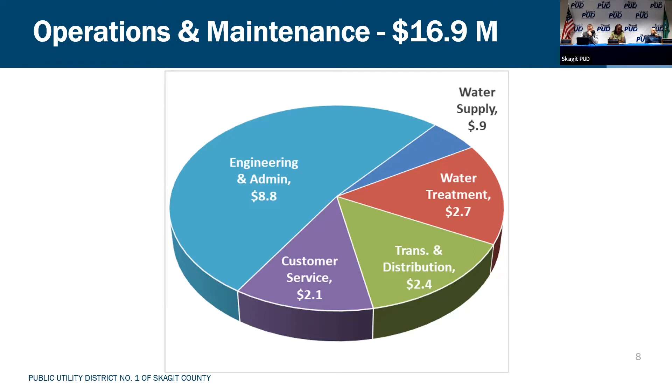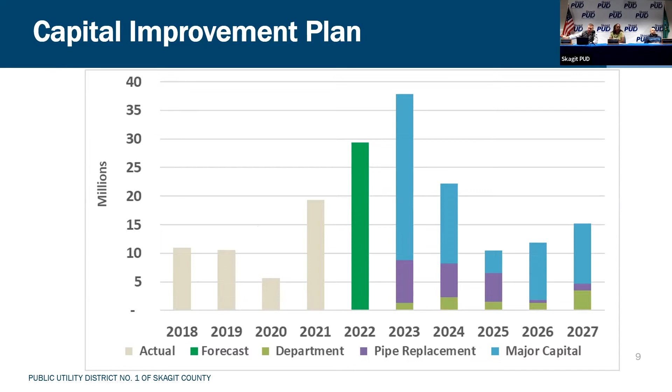The capital projects, as I mentioned, $38 million next year. We have 3 facility projects. Most of that is the campus building for about $16 million. The transmission line should be done, and that'll be about $10 million next year.

Pipe replacement projects, there's various projects that make up that $7.5 million. And then operation and maintenance projects. The largest one is at the water treatment plant, as I mentioned earlier, and it's the backwash and pump replacement. There's also SCADA replacement projects, and then department projects. This is for smaller department projects that consists of vehicles, equipment, some maintenance projects and facilities, software, meter replacements—all show up under the department projects.

After we put all those numbers together in the budget, we balance resources and uses. We validate the financial policy metrics that were also adopted. There are 4 main metrics that we use. The first one is the liquidity target.

This takes the estimated ending balance of 2023 at the end of next year, all of the reserves. I forecast that out, it's about $14.6 million. Our target is 180 days of operating expenses, and so you divide half of the year in operating expenses, that's $8.7 million. And you can see that we exceed the target by just under $6 million.

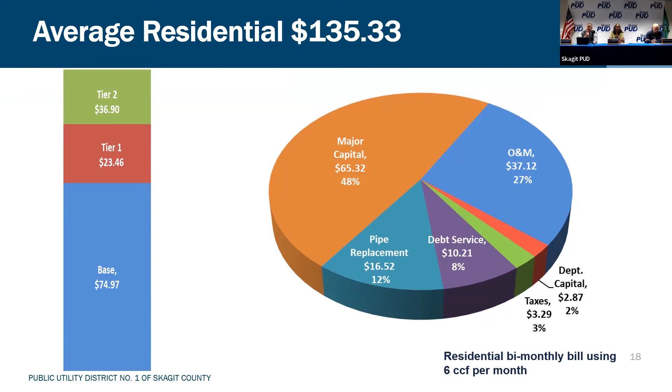I think that's all of the presentation other than the budget schedule. Tonight is the budget hearing, and we will take public comments if anyone is here or wants to make comments online. I will also accept them after this by email, and we can incorporate them.

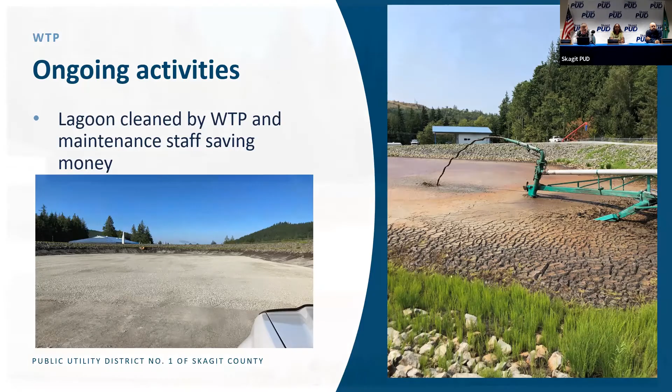So this last season, this year of 2022, this is that same lagoon on the left that with the cooperation of the treatment plant and maintenance, we dried it out. Basically we took all the water off of it, quit decanting to it, and let it dry this spring. It got dry enough where we were able to go in there and scrape up the residual that didn't get pumped out last year. You can see the cleaning off of the banks on the right and left-hand sides, and really cleaned it up back to like fresh, brand new.

The asphalt only goes through a certain portion of the bottom of this thing to scrape it out, and then the sides are kind of a natural clay bottom. It's not like a drying bed, so the moisture never really leaves. So what we decided to do this year is we brought in gravel with our paver and roller and rolled the bottom and basically made almost like a concrete bottom to it.

It'll make it much easier to clean if we can keep going through the cycle of not allowing it to fill up to 3 or 4 feet of material like this has happened in the past. We're going to try and keep them lower and rotate them each year and dry them out and clean them out ourselves and potentially save ourselves some money. That's what we're trying to do anyway. So between the treatment plant and maintenance, they did a great job this year of rehabbing that one, the one basin there.

Now recently we've noticed some cracking that's getting worse on the filter bay decks and walls. So we have a consultant we hired about a month ago that came in to assess how bad the damage was, if it's superficial or if it's structural or what's going on. Then we had engineering go up and we shot some survey points on a portion of the filter bays to see if there's any continual settling going on, or if this settling happened over the first few years of when these basins were added on as part of the treatment plant upgrade a few years ago, or it's been more than a few years ago.

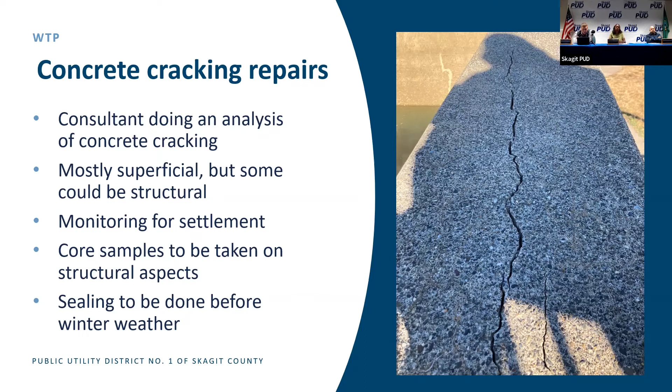So we're going to monitor this situation, and we're going to take some core samples out of some of the bad spots. The process that's going to happen this fall is we're going to take these cracks - most of the cracks are on the top parts of these filter bay walls right here where we expanded the filter bays. Then there's some cracks along the other basins here, the floc basins here and here. And there's a settling point here where the plant was put together and this was expanded, that there's a gap in the wall right here.

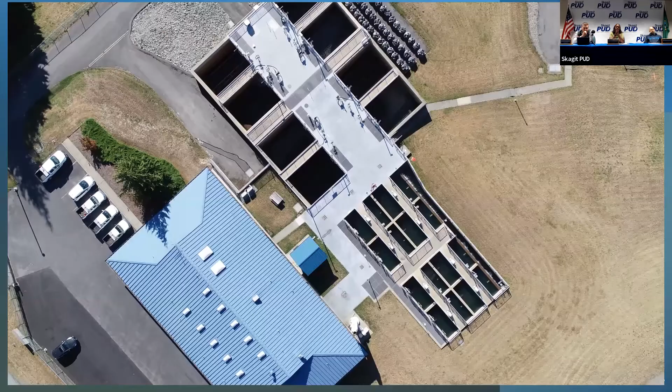But there's about 12 or 13 foot of fill material in here because these walls go down a pretty good distance. So at this point, we're not sure if it's a major structural issue or is this just where it's settled and that's where it stopped. But for the winter, we are going to go in and have these cracks mitigated. This is just an expansion joint between 2 large walls, but still it should be basically ground out and filled with like an elastomeric type sealer. So we're going to go ahead and do that this fall, basically winterproof it. Same with all the rest of these cracks.

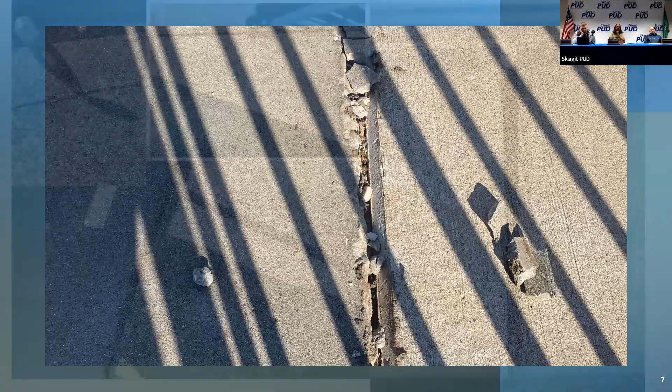We're going to get them ground out and sealed for the winter, and then monitor the settling and see if anything else is going on.

This is the one portion on the right where the floc basins were added on in the last expansion of the treatment plant, and you can see a pie-shaped sag there. Again, we've taken the monument shot and shots around the basins, and we'll watch for settling as time goes on.

The stuff they use will go in there and actually coat the rebar and seal it and keep the corrosion from happening further. He felt that maybe the rebar was poured too close to the top of the wall. So I'm not real concerned about those, more concerned about the one on the right with the sagging of the floc basins.

We've heard a lot about the chlorine scrubber. This is the picture of it as of this morning. Broke ground on the 5th. The electrical and the rebar all got inspected today, and concrete will be poured tomorrow, so we'll have a slab in place.

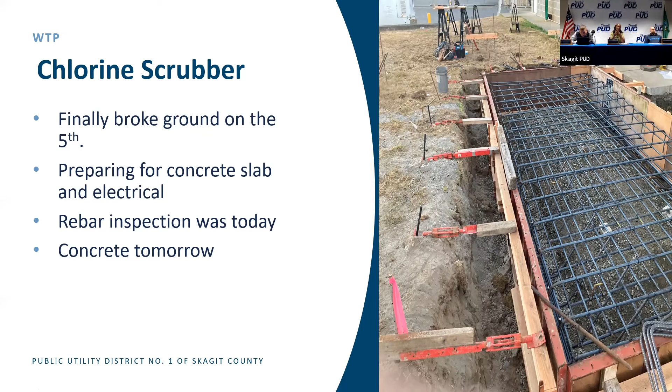You can kind of see electrical stubbed out over here in the corner. So that's going to progress rather quickly now. We hope once we get the slab in there we can get the scrubber on.

Gutters. I'm sure you've all noticed the gutters got ripped off last winter in the storm on the treatment plant, and some here on the building. We've had a hard time getting any type of response from any gutter replacement companies to come give us any kind of a bid or replacement.

We finally got Fisher and Son, who started up their own roofing portion of their company, and we finally got a bid to replace these. We've had other companies come up and look at it and say, oh yeah, we'll get back to you.

Never heard a thing. The difference between the gutters on these is they're 8-inch gutters, and the gutters are hooked to the flashing that goes up under the roofing. So you have to take the roofing up to replace these gutters properly.

So we've gotten a bid to get them replaced, we have a contracting process, and now they're going to start sourcing materials. Hopefully we'll get these things done, because it's a safety issue, obviously above the doors and the sidewalks, with water running off and potentially freezing on the sidewalk, besides just the visual appearance. But that's finally in process after numerous attempts to get somebody up there to get them fixed.

Like, this is the PUD, we need to get the water right. Can't get anybody to show up to do a job, and then when they do, it costs you a fortune.

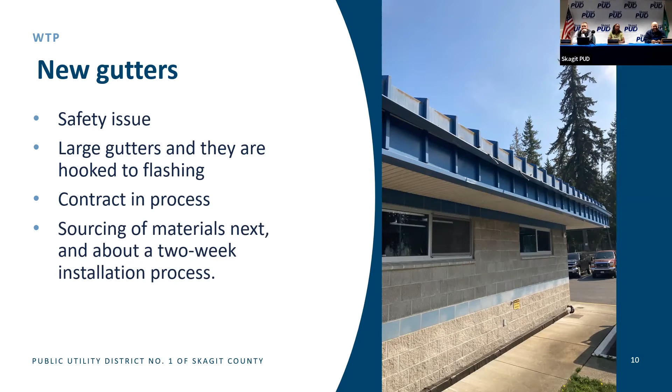But yeah, they're kind of torn off the front of the lip of the building there, right over the front door. So we're going to get them done, obviously, all the way around the building. But again, it's a larger process than just a nail-up gutter, because the flashing goes up underneath the roofing, so it's a fairly complex process.

Talking about meters, we've had 40 meters tested this year, around 40 of the 2-inch to 8-inch tested, and 10% of those that we tested showed a combined loss of 17%. That's just across those 10%. I should say 10% of those meters showed revenue loss, and the 17% might have been 6% on one, 1% on another. But regardless, we got them all repaired and fixed.

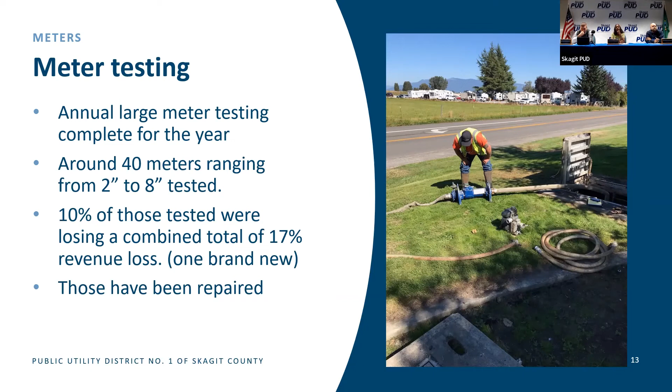So it's a good thing we've been out doing this meter testing program, because that's pretty substantial. One meter wasn't working at all - it was dead right from the factory, it wasn't even turning the turbine. So it's good that we went through this process and found these things, and we'll be doing it again next year as well. The ones that were failing have been repaired and put right back in service.

So that's a test meter on the left that they use, a calibrated test meter. On the right-hand side, what has been done over the last several years is put a 2-inch test port on the back side of the meters, which for a long time we didn't have, but we're ordering now with test ports. You can see where the hose hooks on the back side - that's how you get the water out and test against the comparative meter.

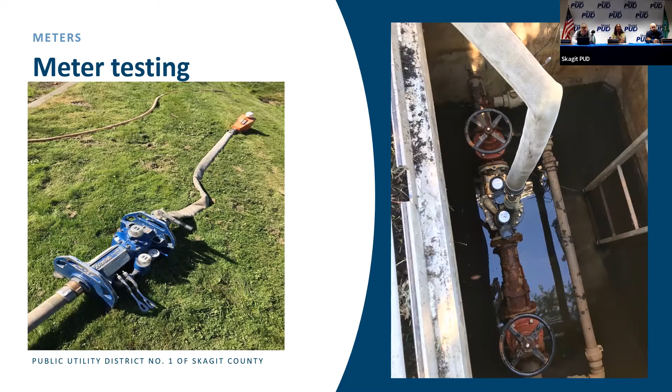Talked a little bit at WPUDA about some of our resilient stuff we've been doing. We've put underground wire at the Alger well. Our Alger system is a little bit fragile due to the amount of usage on it and its reliance on power. The power up Cain Lake Road is really iffy, and we had an overhead strike from the poles you can see in the pictures at the top of our pump house, with limbs coming down in the wintertime. Our power gets knocked out, communications get knocked out. So we decided it'd be a good move to trench it and put conduit, an underground service between the poles and the buildings.

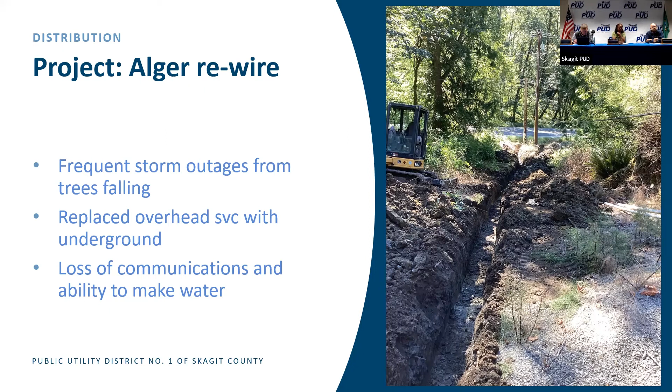We did that this summer, so now our communications and our power are both underground, which should give us a lot better resilience there. At the same time, we also put in a standby generator with propane. So now anytime the power is out, we will still have communications and power to run the well.

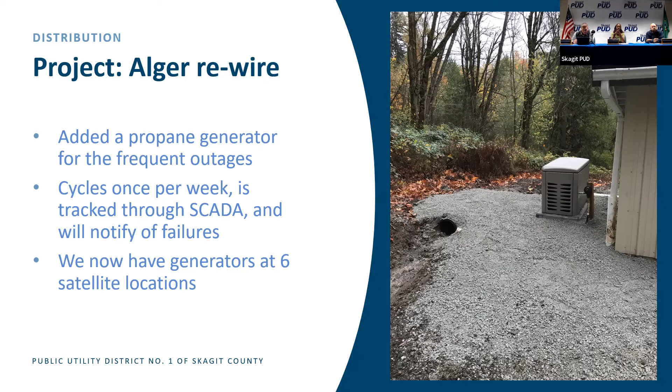We've done 6 of those now in the last 4 years, probably. We have 2 at Alger, just put one in Rockport yesterday, and a few other places out there in the system, which makes us more resilient to outages and keeps people in water. We're going to continue to do probably 3 or 4 more at all our satellite systems as time goes on.

We had our annual reservoir cleaning last month. This is Eagle's Nest at Eaglemont, our tallest tank, which they typically can't do a very good job on because they can't spend much time on the floor. The diving time is so short because of the amount of water in there — divers can't spend more than about 15 minutes apiece on the floor. So you've got to switch out divers, and it's 120 feet tall. Getting their gear back and forth was difficult, but they managed to do it this year and get us an inspection of that reservoir, and I believe 5 others.

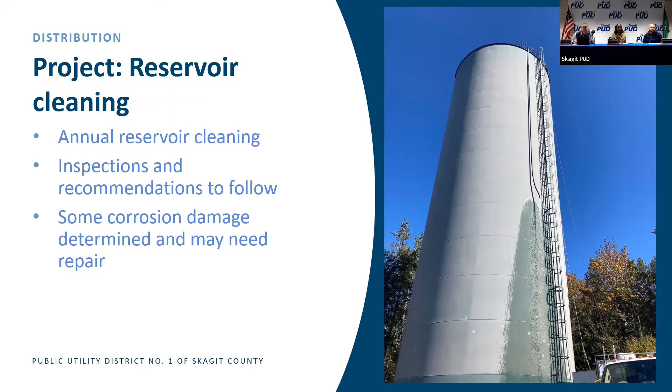What we get back at the end of the diving season, which we do every year, is that all the reservoirs have a diver in once every 5 years. So we get inspections and reports back to basically tell what they've seen. They have an underwater video to point out corrosion spots and flaws in paint or things like that — that's what we look for in the report. If we get the report back, we look at it, and the next time they come out, we can have them address it and fix it. It's just a continually rotating cycle on all of our reservoirs for the cleaning and inspection process.

The transmission line tie-in was the fourth between the 24 and the 36-inch lines. It's an 18-inch tie-in that was done at the base of Fox Road, which basically gives us the ability now to shut off the transmission line between the bottom of Fox Road and the treatment plant if anything was to break — that's been our Achilles heel over the years, where it's broken the last few times on the hill. Now if we ever need to, we can shut a valve off and isolate that portion, but for now we'll still keep both lines running.

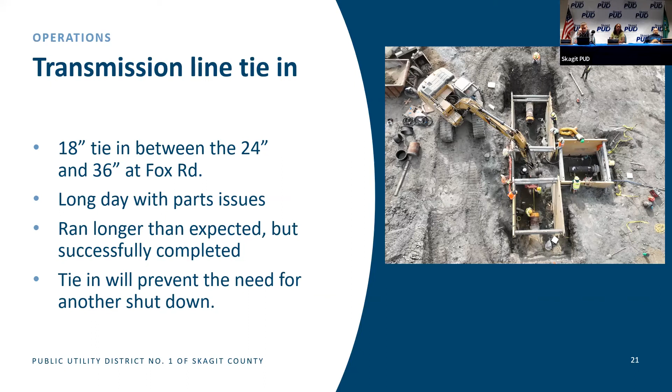It was a long day for the crew. We had some parts issues, not fittings — things weren't lashing up well. They spent 12 hours in that hole working on that job. The distribution department spent probably 16 or 17 hours that day shutting it down and all the way through turning it back on and flushing. It was a large project by all the crew and staff. It was a big day, but this will also prevent us from having to do another shutdown when we tie in the 36-inch — it'll save shutting down the transmission line and putting everybody out of water again.

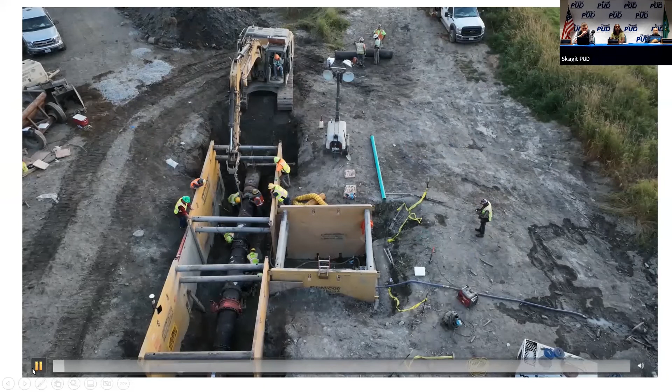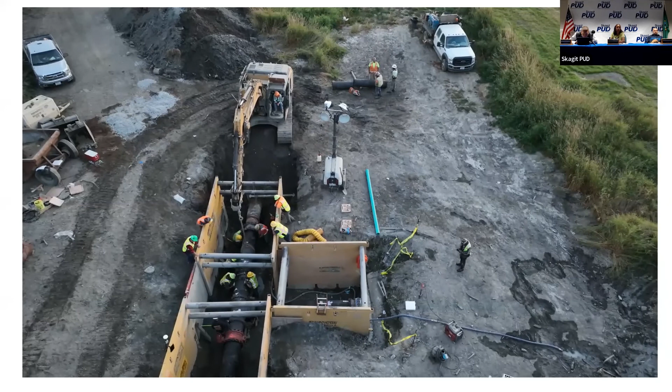Some of the problems we had with these adapter joints were with the transition from concrete cylinder to ductile iron, and they were a little bit out of round. Luckily we had a few more, but by the time the guys found these parts and pieces, it cost us a couple hours figuring out the problem. Ultimately we swapped out these adapters, got new parts and fittings and restrained flange adapters, or barrel sleeves, and were able to get it back together. We had a shutdown from 5 a.m. to 5 p.m., and I wasn't getting the water back on until almost 10 or 11 because of some of these parts issues. But only 9 people were out of water, so ultimately it wasn't too bad. We don't like exceeding our shutdown time when we don't have to, but sometimes things just don't work out as well as you hope.

This is basically a flyover Brant was doing while the guys were doing the last bolt-up there. You can see Brant down there somewhere flying it. There's the 18-inch connection here, our existing 24-inch transmission line, and here's the 36-inch transmission line. The guys did a great job, it was a long day working with both right-of-way crews, at the base of Fox Road where the big laydown area was, kind of right at the base of the hill.

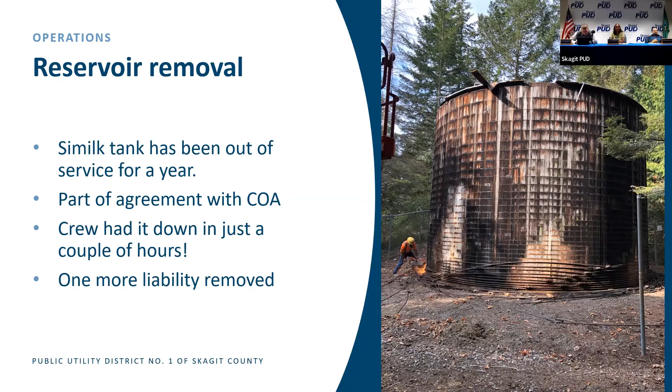One of the other projects we did recently was take down the old Similk tank as part of the agreement with the city of Anacortes. This is one of the projects we were getting done before the turnover. We haven't had water in this tank for a year, and we thought it was going to be quite a project. You can see it's wrapped with steel rods from top to bottom, every one of those lines was basically where one of those rods was. It's just a freestanding tank of wooden staves all put together, a wooden tank no longer in service. To me it's a liability. We like to get those things out and down if they're not in use. So the crew went out there and took it down.

The wood is beautiful. I'm not sure if it's white cedar or red cedar, but those boards are all 15 feet long, and I don't think there's a knot in any of them. All straight, pretty incredible unit. It's all in a heap now, actually collected back here in the yard, but that job went a lot quicker than we thought. It was put in service in the 60s, and looking at the end grain on the wood we took out of it, the trees it was made from had to have been a couple hundred years old. The grain is really, really tight. Pretty impressive looking stuff.

Pardon, Mike? Yeah, 53? 53. Total 53. Okay, there you go.

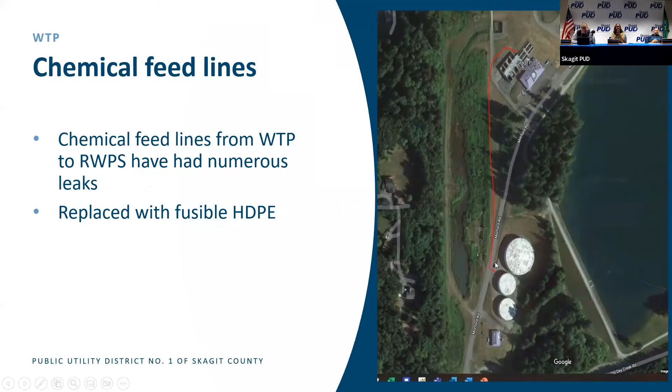Another project we've talked about before is the replacement of the chemical feed lines with fusible HDPE pipe. You can see in the picture where it goes from the back of the floc basins into the basement. Our crew dug down along the easement, crossed the road, and went over in front of the second clear well, where there's another vault for the chemical injection points. The guys fused all the HDPE themselves, and it's all laid in the ditch with sand and buckshot now, instead of boulders and hard fill like before. So this should hopefully be a long-term solution.

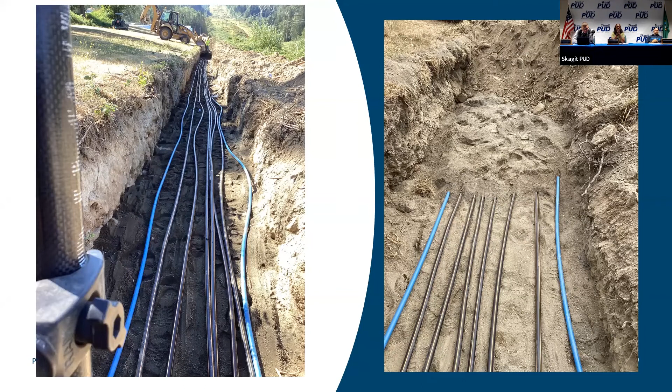Also along with these chemical lines, you can see the two blue lines—those will be a couple of sample lines from the pump station up to the treatment plant. Currently during the day, the guys have to get in a truck and drive down to the pump station for a raw water and a finished water sample, going back and forth a few times per shift. Now those samples will be pumped up to the treatment plant, saving all that driving back and forth down the road, hopefully. So it fixes a few things.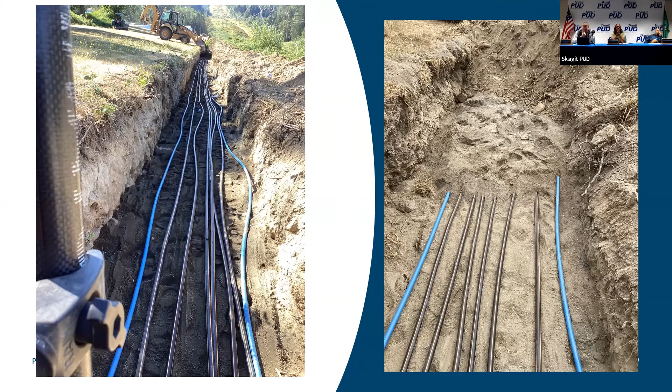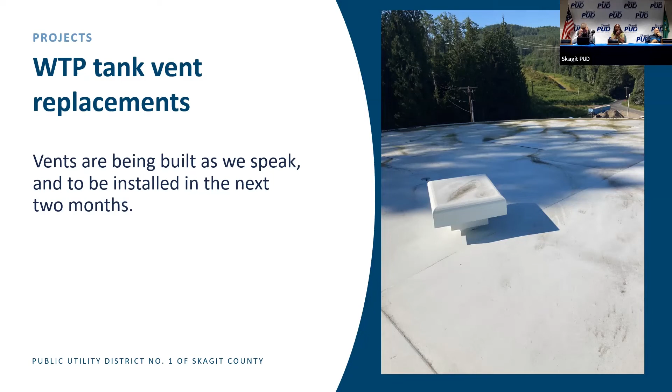We've talked before about the treatment plant clear well vents. Those are being built as we speak, and hopefully in the next month or two those will be put on. They look like they're in great shape, but the underside, the screens and stuff, are corroded and need to be replaced. So there will be all new vents put on the clear wells.

We're not going to talk too much about the budget stuff until next week, but one of the budget items coming up next year is we're going to start putting money in each year for tank repainting, because this is the third clear well. The sides of the tank are pretty good, but the coating failed on the roof. We got an assessment done, and it came in at $166,000, which years ago probably would have been about 30,000. So we're hoping prices will get better by the time we go through the bid process.

Yeah, well, paint for one, it's hard to get a hold of, period. We had to go to Bellingham to get paint to work on the trim of the shed out here because you can't even get it next door, and it's difficult to get.

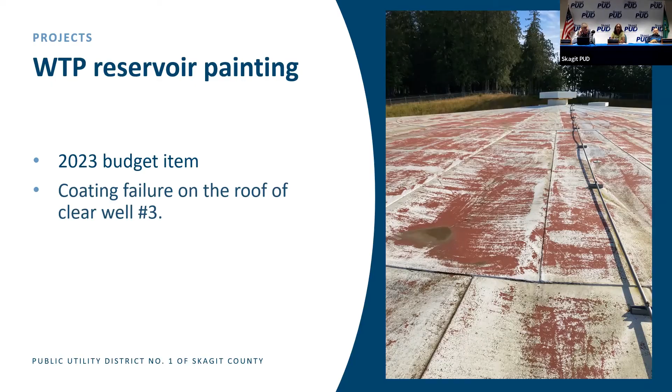So with the coating failure, it's down to the primer. That's not rust, that's a red primer. So it's not like we're eating through the roof, but it still needs to be addressed and recoated.

This is what it looks like in some of the vents. If you look down underneath the vent, this is where all the steel beams that support the roof basically come together. It's called a China hat. So this is a supporting pole in the middle with a piece of steel, and all that box iron is on end to the center point below the vent. Any steel tank that has gassing off of chlorine is difficult to maintain.

And then these areas, I think when the tanks are painted, are either missed or not prepped and done properly. You see this a lot at the vent area. So these are things we keep an eye on, through either diving videos or our own self-inspections. You find these things, and it's stuff we just got to start planning for and putting money towards and staying on top of. All these assets we put in the ground for the last 40, 50 years, they're not going away.

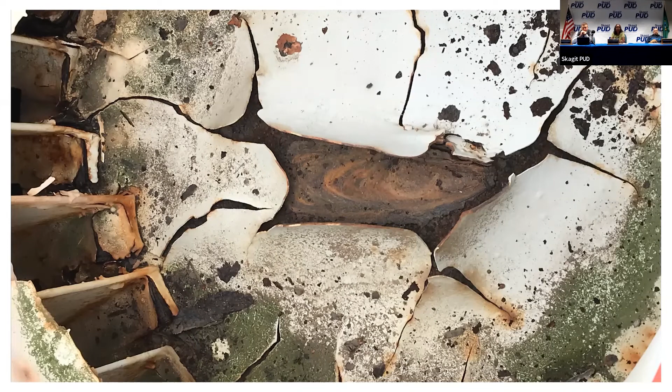Do they grind that out around the top then? They'd have to take the thing off and abate it, either empty the tank or abate it from underneath, and then repaint it.

One new addition we got to the fleet this year - we weren't able to order trucks because they just weren't available during COVID, so we kind of shifted direction and we've been looking at a remote mower. We've rented them a couple times over the last few years to do the steep backsides of the dams, and the backside of the clear wells, anywhere it's dangerous to get either a machine or people. We used to have people with weed eaters do it years ago, which is really not a good idea. This remote mower allows us to mow a 58-degree slope remotely, up to 800 feet away, and it'll cut down 2-inch trees.

Got a little clip here, kind of shows it in action, if we can get this thing to work.

Pretty handy little machine. It's got a winch on the side, it's got lights on it, it's got a camera on it. Basically, the guy has a controller in his hand that has an iPad. You basically watch it like you're flying a drone.

This is the backside of a dam, and it goes pretty quick. Again, like I say, you can go up to 800 feet away, out of line of sight, and still operate it.

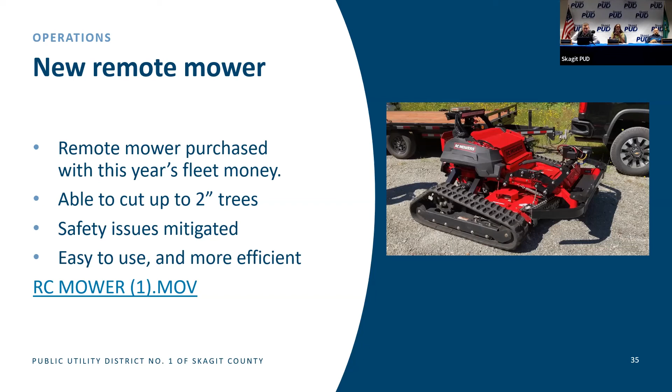It's mainly - I don't know if you can, from Jay's standpoint, my standpoint - it's a safety and risk mitigator, getting someone to hurt their back. I mean, it's a pretty steep slope up there, steep for having people up there doing it by hand and also for machinery. If you get up there on those slopes using either a tracked machine or a rubber tired machine, you're also tearing up the ground, sometimes trying to maintain traction, which again is not good for erosion and everything else. So it's kind of a win-win all the way around.

As Jay and I were talking here at the beginning, we had a car. Somebody borrowed his friend's car without his permission, it sounds like. Came down Bow Hill Road and snapped off the power pole, and the power pole landed on our roof. Took out the power to our pump station that feeds the casino. Transformer leaked down the side of the building. We just paid a bill of $30,000 to repair the roof.

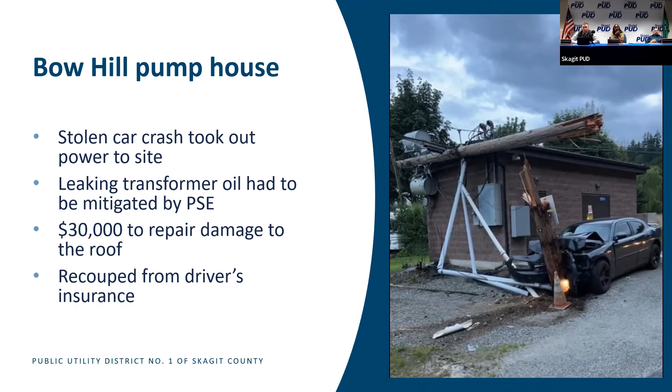Well, they got passed on to their insurance company. And Jay just informed me that the PSE bill to the driver was $184,000 for the pole and the power cleanup and the mitigation of the transformer oil, where the new road is there.

Yeah, we've had that building hit 3 times. People coming down the hill. One time they came down, they peeled that box right off the front right there, took it right off the front of the building, took the doorknob off. It just barely scraped the door. And one other time they hit the opposing wall over here. It's kind of a bad spot there.

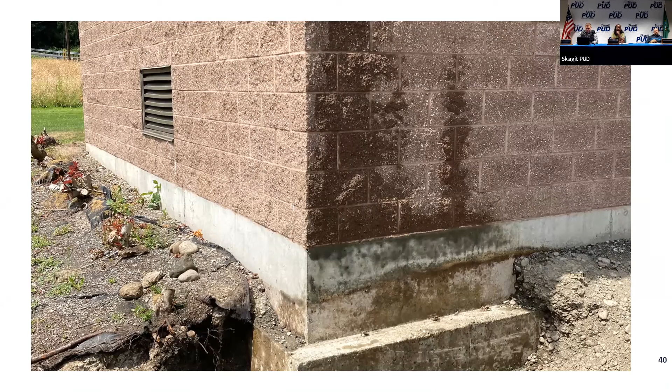So yeah, PSE had to have a Vactor out there and clean up and remediate the soil and all that kind of stuff from the transformer oil. So all that got passed on to the unfortunate driver's insurance. But it did kind of bugger up our roof a little bit, and there again, it took 3 months to get somebody out here with the materials to fix it.

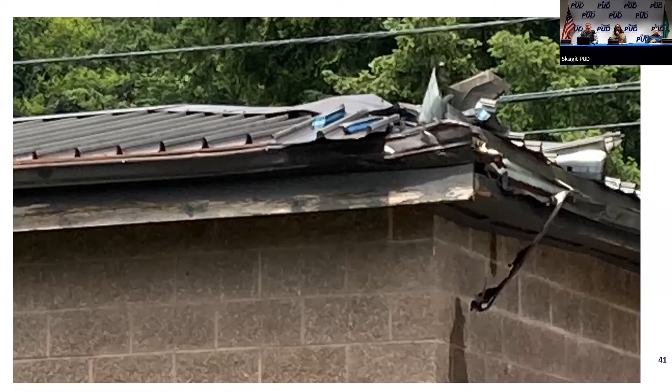And lastly, the trees. Give you the before and afters. What used to be.

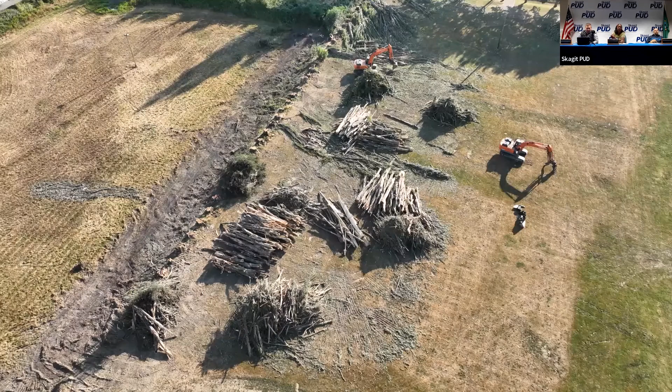Was the first row cold decked and ready to go? And kind of the process on how it took place.

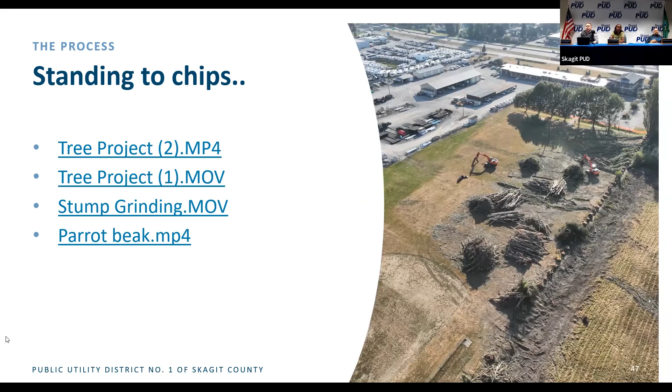Yep, so I do the whole... Hold on, screen up. So I can expand it here. Kind of. So anyway, that tree there, and then what else we got here?

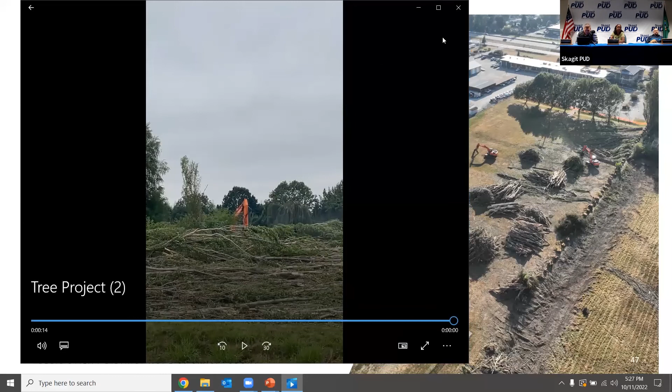Goes from the falling to the grinding to the feeding of the industrial sized chipper.

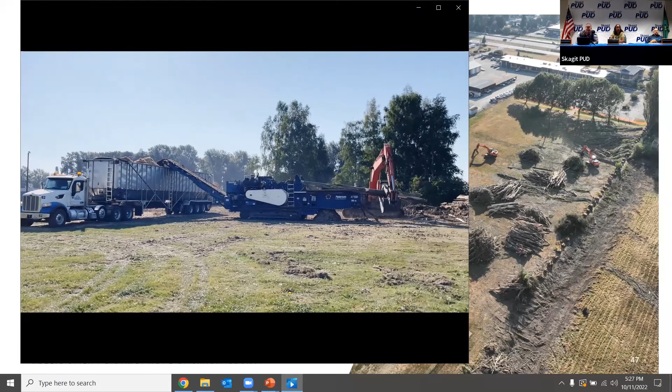120-yard truck. I'm not sure how many loads they hauled out. I'm thinking, I'm not sure I even counted them. A lot. But pretty impressive process, the way those guys came in and took all that out, feeding whole trees into that thing, just grind them up and away they go.

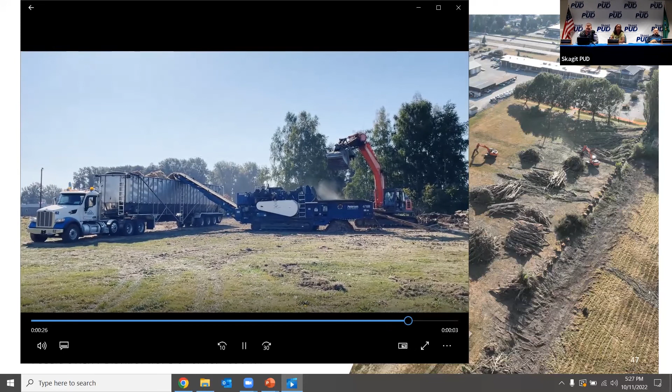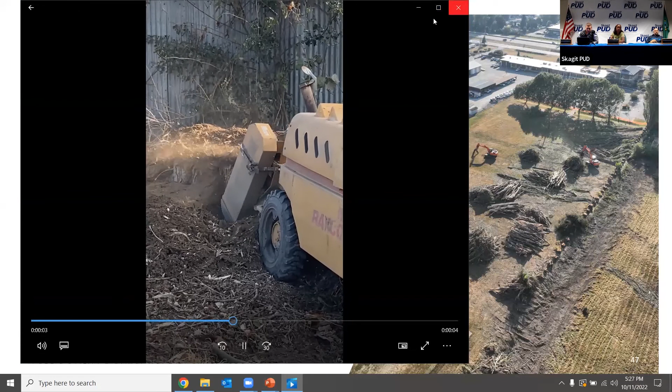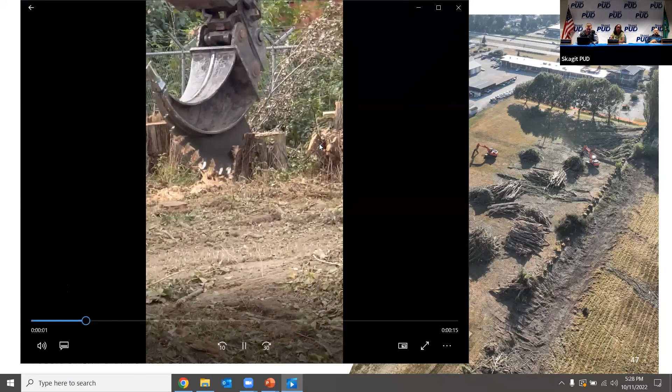So they hauled the chips, and once the trees were ground up, they'd grind the stumps with a portable grinder for the stumps they couldn't rip out. They ground them in place, and the ones they could rip out, they used what's called a parrot beak and ripped them out or tore them out with the pointy part of that.

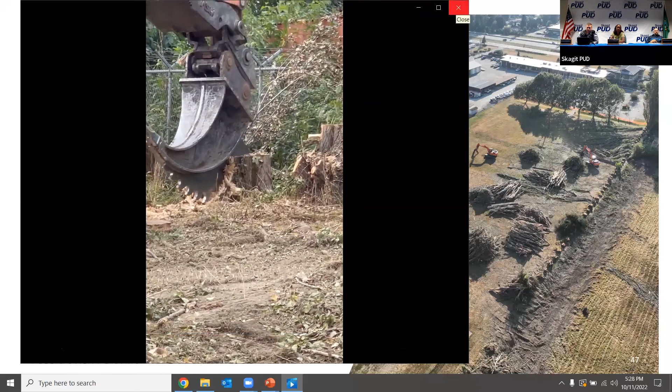So the guys were definitely geared up for that operation. They did a great job, cleaned it up really nice. Pretty impressive project, and there's what we got now today. A little bit windier here now too.

Will they put something on there to stop them from growing back even after that? Because some poplar trees are crazy like that. Yeah, they ground them down pretty good underneath, but this property line here is where a lot of the utilities will go in according to Sam, so that's going to be torn up again anyway for the new building. That's one of the reasons why we went ahead and got this done now as well. But if they do start coming up, we'll be able to remediate it with our mowers or spraying or whatever.

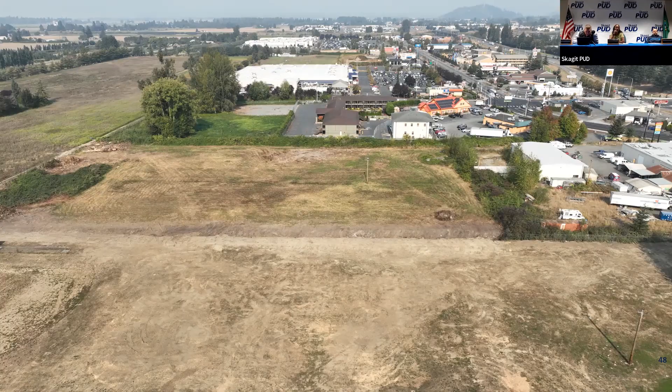So, on to new business. That's an application for water service, charge in lieu of assessment. I believe this was on the voucher system. And Bill Truman is going to present.